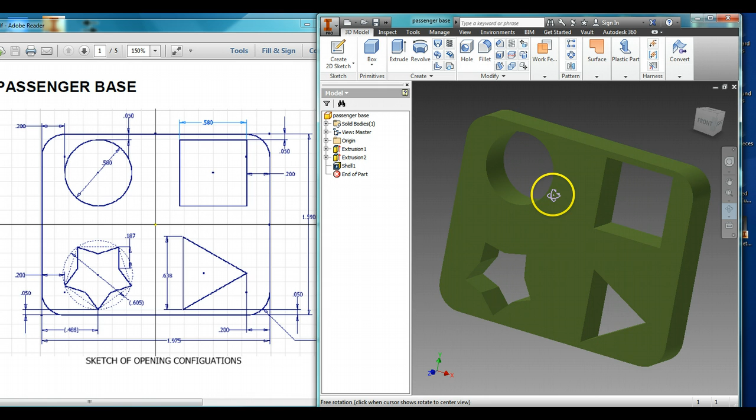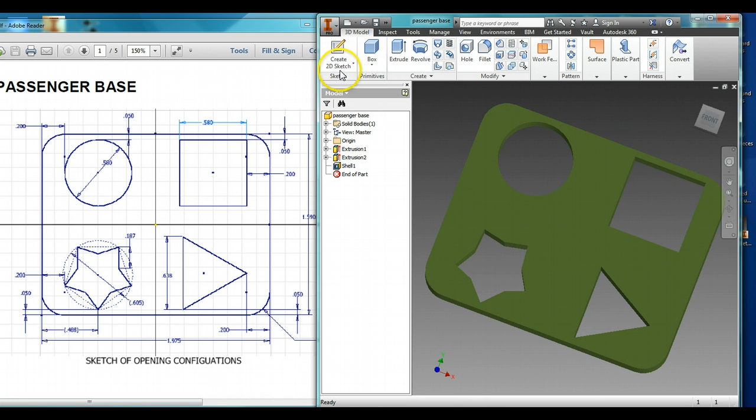Okay, we're going to take a little while here and work on this passenger's base for the Automoblox vehicle. It is shelled out, and the geometry is fairly simple except for this star. I mean, if you just need to fast forward to see this star, by all means, go for it. If you need to watch the whole thing, well, do that as well. So let's go ahead and get started.

I'm going to start a new part, just like we have with everything we've ever designed. Create a 2D sketch. And when we look at the dimensions, it's 1.59 by 1.975. So that is where we're going to start. Rectangle, 1.975, tab, and 1.59. That gives us our rectangle. Now we can go ahead and finish this.

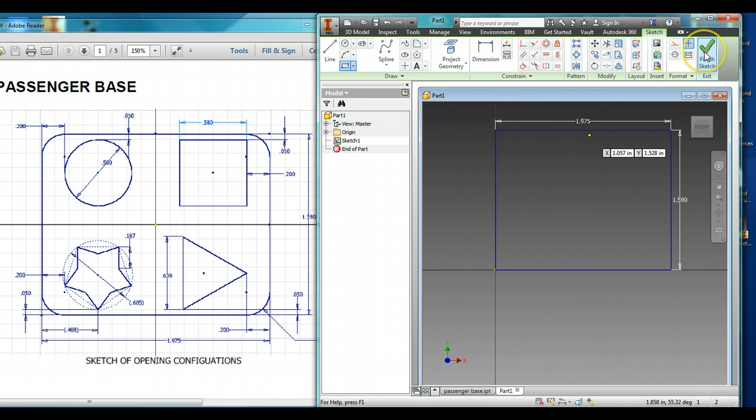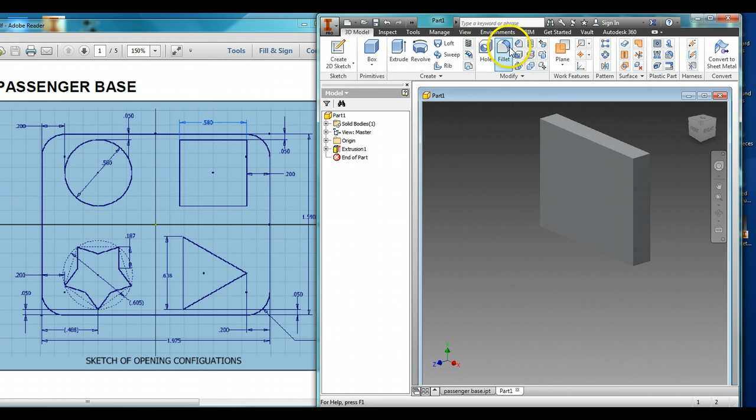And when we look at our schematics, it is 0.30 thick, and it has 0.200 fillets or roundovers. So I'm going to extrude this to 0.3 as the plans call for, and then have fillets 0.20 and round these guys on over. Cool, so now we have the basic shape done.

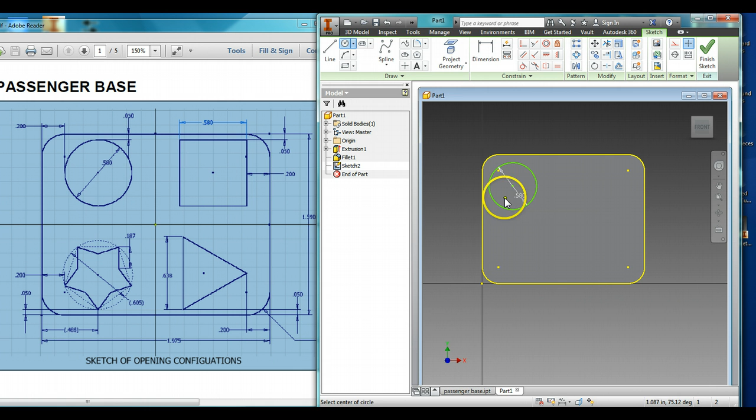At this point, we've got to do a little bit of sketching, create 2D sketch, put it on the face right here, and I'm just going to draw in the shapes to start off with. So we can see we've got a 0.580 diameter circle. So 0.580. We've got a square that's 0.580 square. And we've got a triangle, which I'll get started with in just a little bit.

Let's go ahead and start with the circle here. We can see the circle is located 0.050 away from the top and 0.200 away from that edge. So let's go ahead and try to dimension this. Now you'll see that it locates it to the center, which is no big deal because we can use Autodesk Inventor to actually do the math for us. So if we do this, it's 0.050 plus 0.580 divided by 2. 0.580 because that's the diameter of this, 0.050, so that should snap it to the right location right there. We're going to do the same thing right here.

Let's see. When we dimension this, we want it 0.200 plus 0.580 divided by 2. And there it goes. Snaps right to it. Now the square will be a little bit easier for us because we don't have to measure things based off the center. So right here it's top to bottom 0.050 and then 0.200 right there. Okay, so that square is now located in the right place.

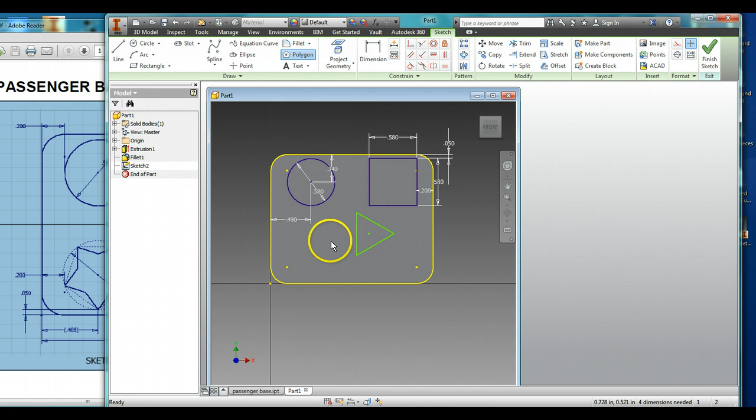Let's work with this triangle. The triangle is 0.638. It's an equilateral triangle. So what I'm going to do is just open this up a little bit, and you'll see the polygon tool. I'm going to click my polygon tool, and a triangle is a three-sided polygon. So I am going to draw a three-sided polygon right there. Size doesn't matter at this point because I am going to dimension it to 0.638.

Now the next thing that I'm going to do is make sure that this is perpendicular to that. So we have the constraint tools up here. I'm going to click on perpendicular, click on that line, click on that line, and now it's constrained to be at a 90-degree angle there. We're going to locate this from the tip, 0.200. So the tip to that line is 0.200, and then from that point to the edge is 0.050. There we go. Now the triangle is in the right place.

Now let's deal with this star. The geometry is a little bit difficult. We're going to first start out with a circle, and the circle is 0.605 in diameter.

And let me just locate that a little bit better in here. There we go. Circle is 0.605 in diameter. It's located 0.200, so we're going to do the same thing. 0.200 plus 0.605 divided by 2, and that locates it right there.

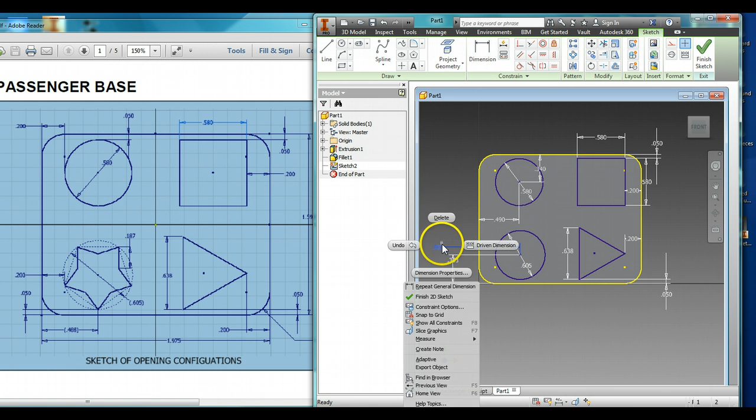And then the same thing, 0.050 plus 0.605 divided by 2. There we go. Now that circle's in there. I'm going to delete some of these dimensions just so you can see a little bit better as I'm doing this.

We have a polygon that's going to go in there, an inscribed polygon. And you can see the dotted lines. It's 1, 2, 3, 4, 5 right there. So I'm going to click on my polygon tool, and right here, circumscribed or inscribed. I want inscribed. I want 5. Put in there, and ta-da! See how it clicks in there? That is my inscribed polygon.

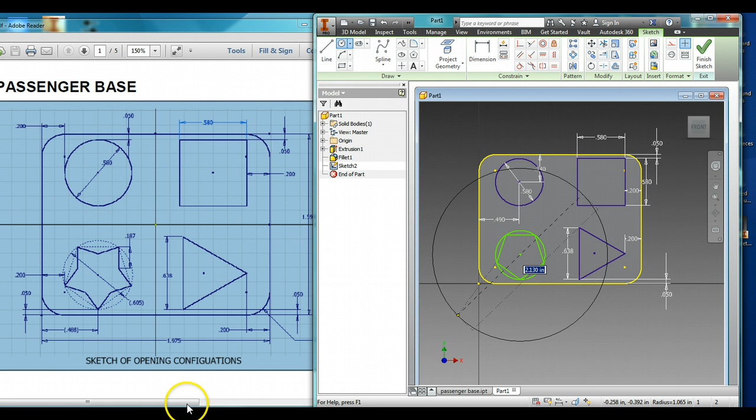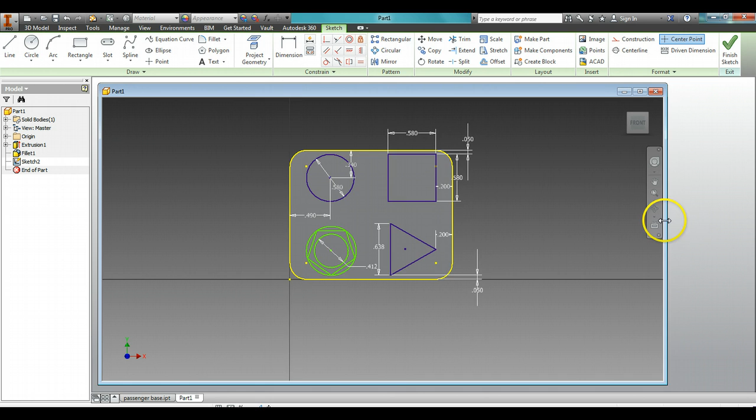Now you're not quite done yet, because we have to draw another circle inside of this. So I'm going to click on my circle tool and just expand this until, let's see, I paused the video just for a second to bring up this other plan. Our secondary circle is 0.412. So 0.412 interior diameter right there. Okay, at this point I'm going to minimize this and make this bigger so you can see a little bit better, because it's as good as we're going to get.

Okay, at this point I need to install some actual points here. So I'm going to click on point, and I'm going to go right in the middle of this. And you can see how my point coincident constrains to the middle of this line to the middle of the circle. So I installed a point. Go to the middle there, and it coincident constraints to the middle, right there. Same thing here, it coincident constraints to the middle of that. Coincident constraint, and there it pops on right there.

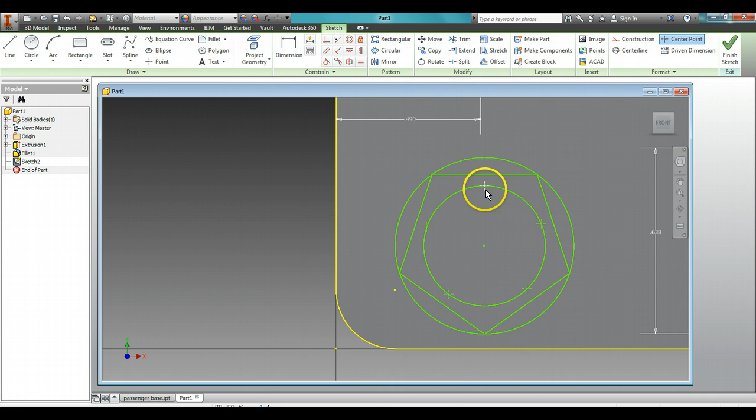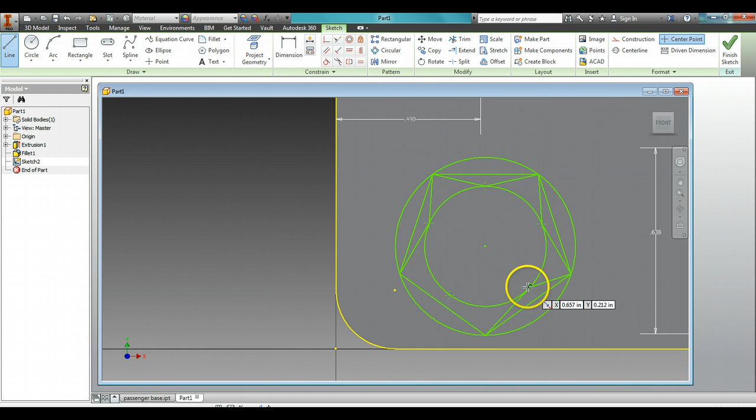So you can see what I have are lines in the middle of these pieces. Now I need to draw a line from this intersection to that, this intersection to that. Now do the same thing on every intersection here. Now what I'm left with is a really cool looking star shape, but it's way too much for what we actually need. So I've got to do quite a bit of trimming.

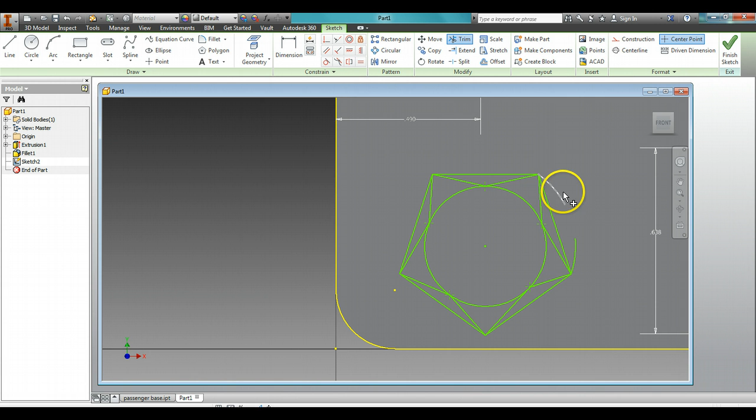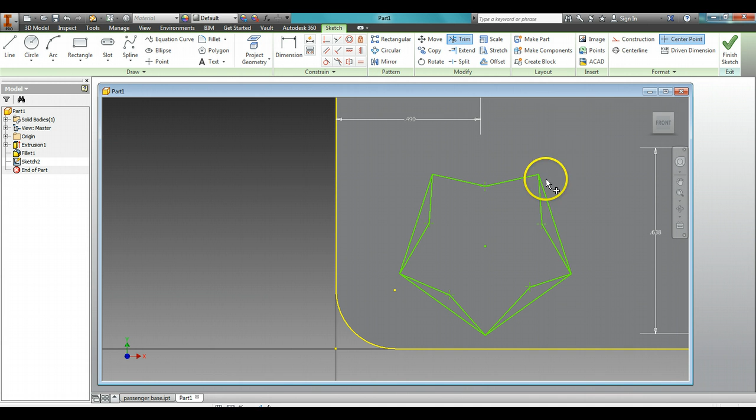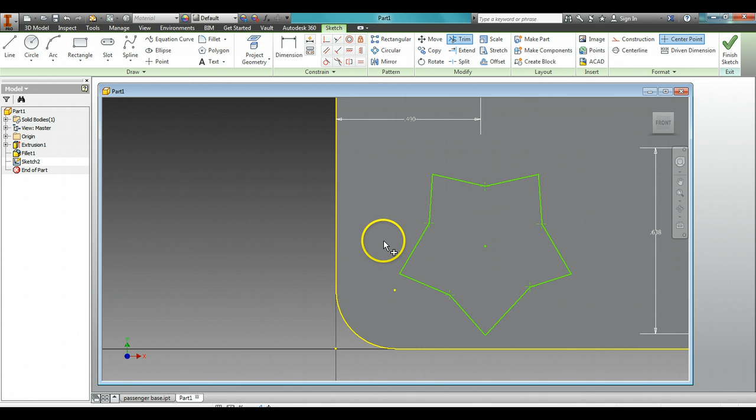Trim the outside circle because we don't need that any longer. Going to trim, let's see, the inside circle because we don't need that any longer. Now I'm going to trim, excuse the pop-up, trim the old polygon because we don't need that any longer. There we go. And what we're left with is our star. I'm going to zoom out and finish the sketch.

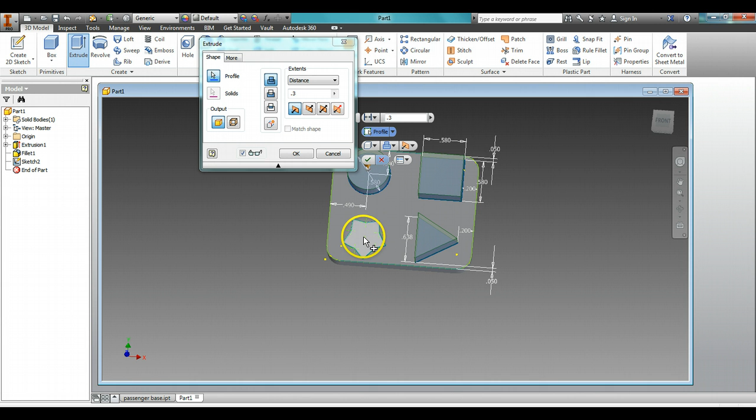Now it's time to extrude. And it's 0.3, and I'm going to hold down the Shift key, select these 4 objects while holding down the Shift key, and I am going to put cut, which will take them into negative space right there. So there we have this done, but the back isn't shelled out yet.

And you might be saying, wait, what, the shell? I know, that was lame.

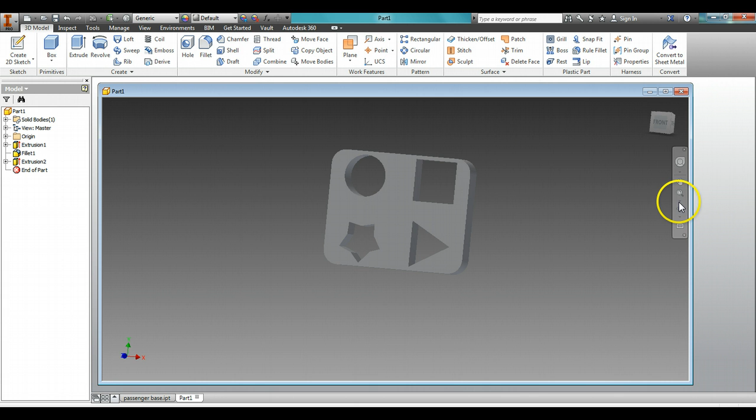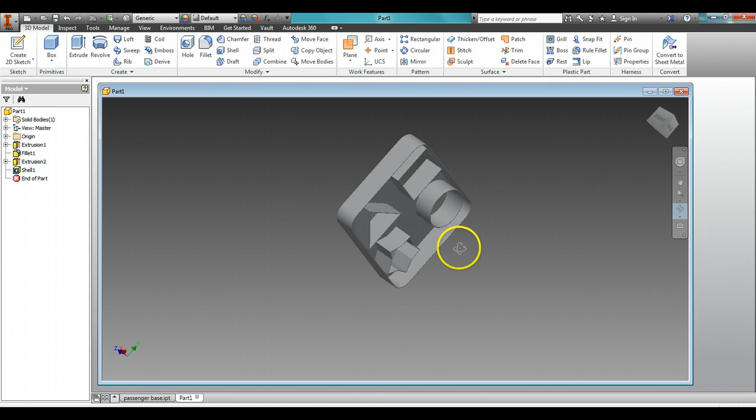Okay, so we flip over to the back side, click shell, and it is 0.01. Click the back side, and we instantly have a shelled out feature. So that is all that it takes right there. Okay, so this is kind of a long video. It's fairly complicated. So make sure that you stop this video, rewind, and replay as many times as you need in order to get the job done.